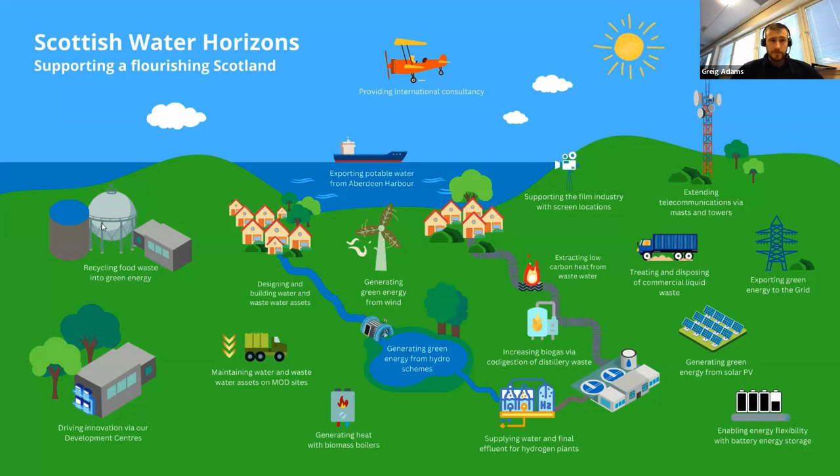Ourselves specifically, what I'm going to be talking to you a bit more about today, is our development centres. So our development centres harness the Scottish Water assets there to drive innovation in the water and wastewater sector.

We have two live water and wastewater assets which are on a live treatment works, where you can tap in to test your products on a real life situation rather than using lab based testing.

This contributes to the Scottish Government Hydro Nation ambitions. We aim to foster cross-sector collaboration and knowledge exchange. This is a key partnership with the Industrial Biotechnology Innovation Centre, having Bioeconomy Cluster sessions like today. As I said, it's managed through Scottish Water Horizons on Scottish Water-owned assets.

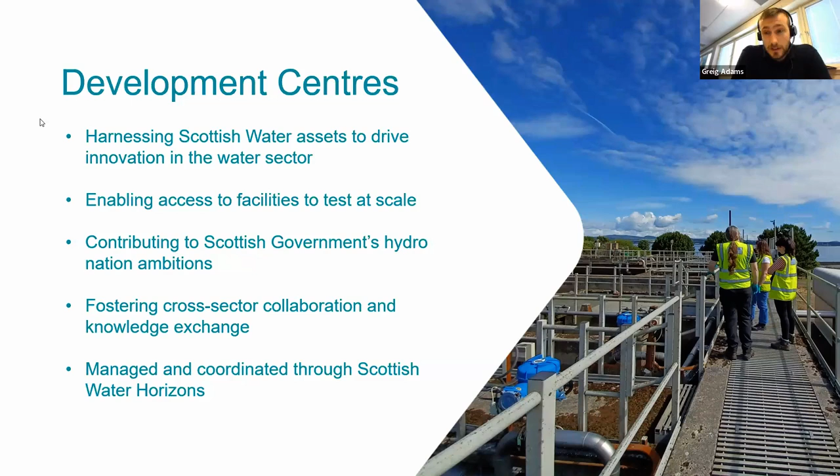Our key sectors, obviously, are the water industry and the wastewater industry - that's our focus, it's what we specialize in. However, we can also cater to biotechnology, pharmaceutical, construction, food industry, and the drink industry.

So Jonathan, who you'll hear from a little bit later on, he came to our site at Bo'ness and brought his own feedstocks from the fishing industry - he built an IBC load of fish waste in our car park to be used as the feedstock for his trial. We've had other food and drink products too.

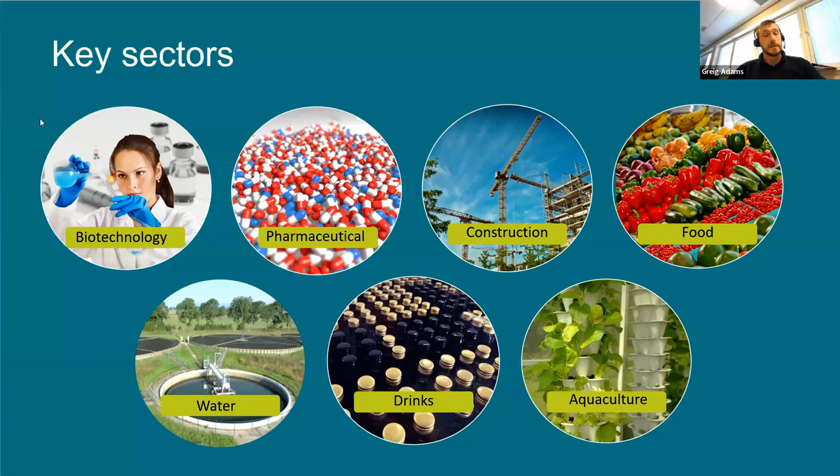We've had pot ale trials from the whisky industry. So we can cater to a wide array of testing parameters if we've got the space for it, and we've got the operators who are always keen to have a new toy.

So our vision is really innovation in the industry. We're looking, with our development centres, to become a gateway and a vessel for new technologies, businesses, academia, and collaborations like the Hydro Nation Chair and Biotechnology Innovation Centre, really to address current problems. There's always problems, and future problems such as climate change, water scarcity, resource limitations, and problems we've not even thought of yet. We want to be at the forefront of tackling these issues and providing a solution.

So at both our centres, the real gain for what we offer is that they're on a live treatment work, so it's 100% real day-to-day effluent and raw water coming in to be tested on. We've got technical expertise, really great relationships within Scottish Water, process science teams, research and innovation teams, and access to UKAS accredited scientific services.

On our sites we have bench testing capabilities, but we also have the facility to send samples to the Scottish Water laboratories to get official sample results, which can be tested against, as I said, UKAS accredited standards.

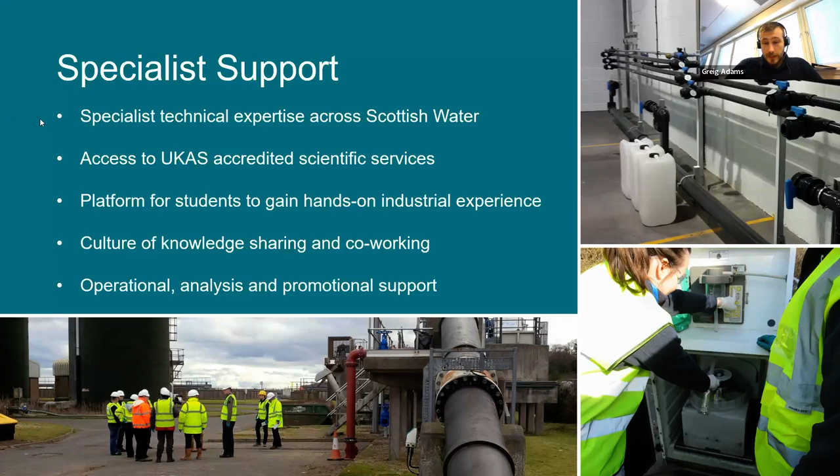We've got a culture of knowledge sharing and co-working, so again we regularly host sessions with industry partners, and we've got a wealth of experience - a number of operators, project coordinators, and a great marketing team at Scottish Water Horizons, so you won't be short of support if you come to our sites.

So we'll delve a bit more specifically into each site. As I say, we've got two. We've got a wastewater development centre located at Bo'ness, about 25 minutes outside of Edinburgh. It's got a live effluent stream, so you can test right from the raw sewage coming in, post screening, post settlement, and then right through to the final effluent.

We've also got a number of redundant assets on site that are available if you require to use them. We can set up a new project specifically tailored to the needs of the trial.

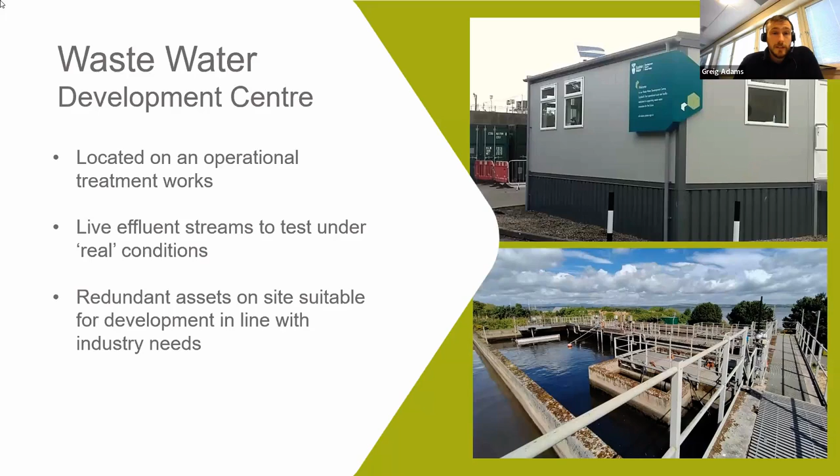So I'm going to go into, see if this works, a 360 view of the testing hall. Hopefully, yeah. So this is our testing hall at Bo'ness. So we've got three bays internally, and as you can see at the back, you've got the live effluent streams which you can tap into. It's really just a plug and play valve system, and we've got 2-pin and 3-pin sockets.

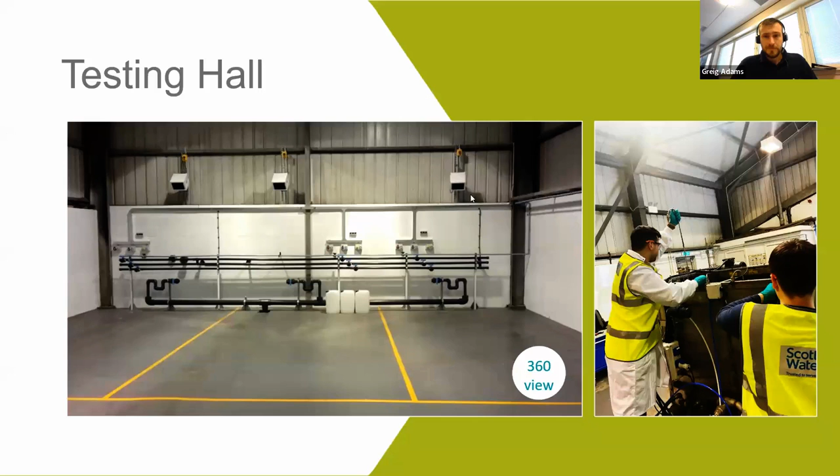We've also got external space for if you've got a bigger bit of equipment, it can fit outside in the car park, and we've got the feeds come right to the outside. We've also got around the other side a dedicated inlet testing area. So this is the inlet flow, and we've got a pipe that tees off that you can again just plug and play into a flange there for screenings and fine screening technologies, grit separation technology, and also if you're looking to test a pump on some of the chunkier sewage that comes in at the front end.

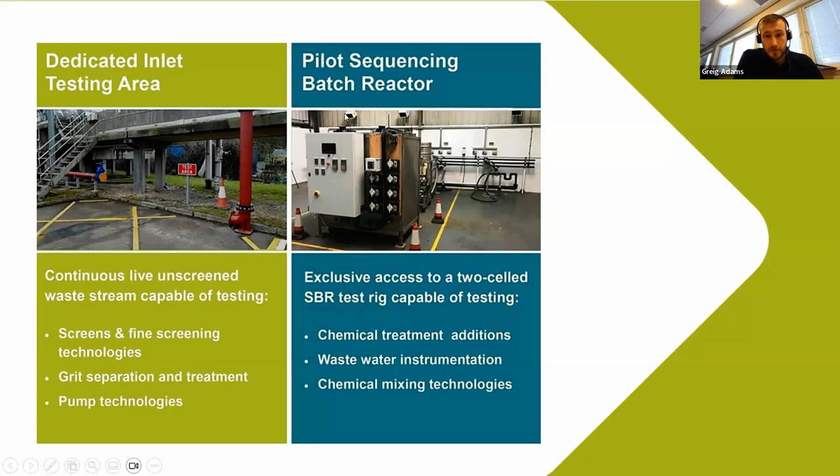We also have access to a pilot sequencing batch reactor. So it can be used as a single consecutive cell, or it can be used as a double cell for whatever treatment you're looking to try. We've had people use it for chemical treatment additions, so likes of poly addition to the floc, wastewater instrumentation. It can be rigged up to sit on top of the reactor, and other sorts of chemical mixing technologies.

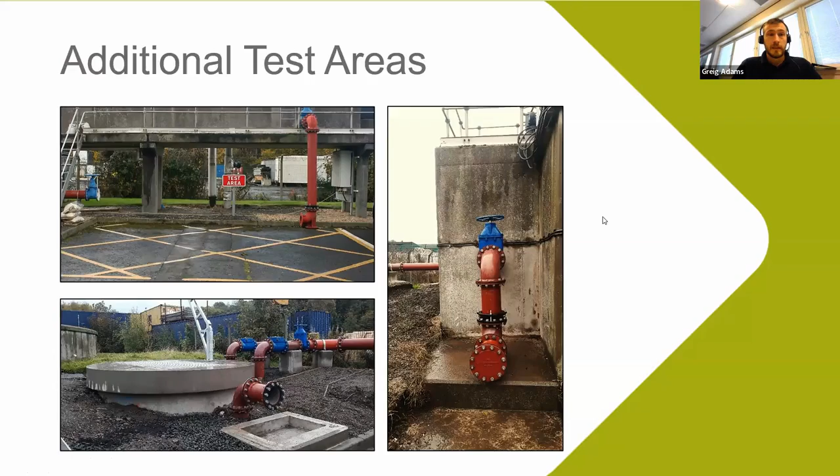So this is just a quick couple of examples. We've got some great speakers to talk about their time here, but there's just a couple of examples of people we've had. So Microvi, they used biocatalysts to treat the wastewater. So you can see it's quite a simplistic rig setup. They've just got buckets of containers with piping in between. So it can be a very low tech, low sort of budget trial. It doesn't have to be a huge rig.

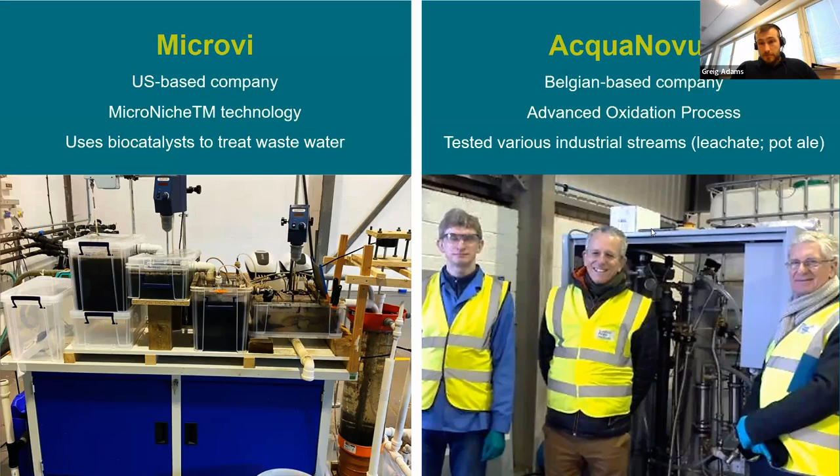As you can see at AcquaNovus on the right hand side, they were using pot ale from the whiskey industry, and you can see they've brought their own rig from laboratory testing to plug in and use the space available. And then, as I mentioned, we've got a couple of bigger pieces of equipment. So Jacopa, a sludge machine. It's quite a big unit. It was sat outside. And then we've got Power and Water, who are also going to be speaking a little bit later on. You can see their equipment there. It was sat outside, and plugged into the wastewater stream.

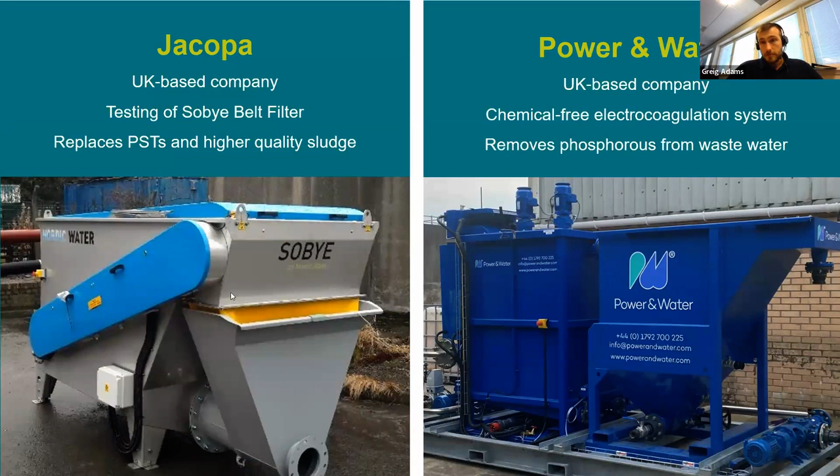So moving on to our water development centre, it's based up in Gorthleck, which is sort of on the banks of Loch Ness, about half an hour drive from Inverness. So it was a disused membrane treatment works. The area has since been mained out to a larger treatment works. So we've made use of this brilliant asset. It's disconnected from the public water supply. So whatever treatment you're working on, it's not going to be going into people's drinking tap. So it's a low risk environment. You can really play about with it.

There's no concerns. And it's a highland resource, so it's got a very varied raw water quality, and depending on the weather, it can vary over time. It can be quite dark as well. So you get some of the best water treatment conditions to really test out your trials.

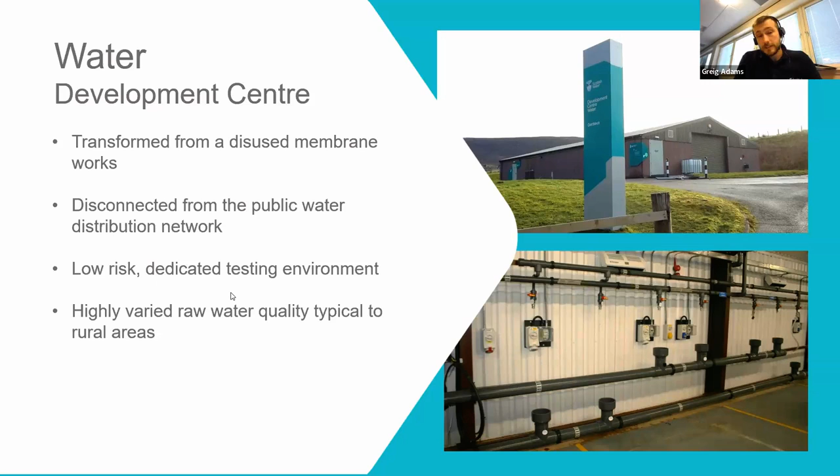So again, I'll try into the 360 just to show the testing hall. So you can see there we've got 3 bays, very similar setup with the inlet feed. So that goes from the raw water into the membranes, and so you've got untreated and treated water that you can test on. We've got quite a big hall, and then you can see these rigs. We've got spiral membranes, tubular membranes. So it's again a very robust treatment works.

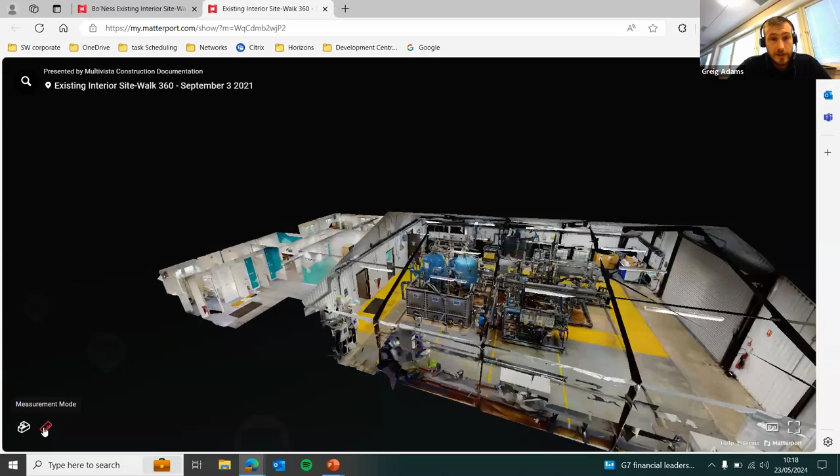Just to give you an idea of the rest of the facilities, we've also got a meeting room, which can be used if you're taking a trial. You can take meetings there. You can have your lunch there. We've also got, if I go through into the hallway, hopefully, we've got a canteen in there.

Not working, but so it's a really brand new asset. It's got great conditions. So you're up in the Highlands, but it's a very comfortable stay while you're there.

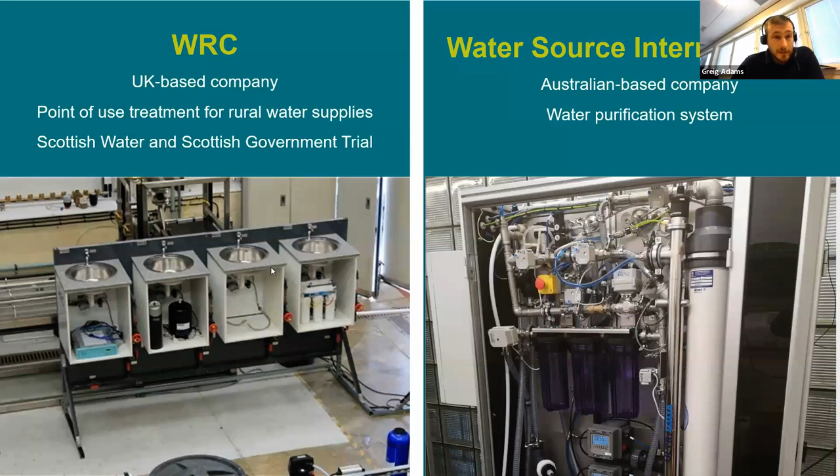So again, a couple of trials we've had in the past: the Scottish Water and Scottish Government combined trial to look at point of use treatment for rural water supplies. So that's essentially treating the water at the tap when you turn it on, rather than treating it externally and then having it travel long distances to rural people's houses.

And then we've also had Water Source International come across from Australia to trial out their water purification system. So you can see that there, it's got quite an intense piece of equipment. So that was trialing against the raw water quality, which as I say is very temperamental, which is really the best you can hope for in a trial situation, to get the biggest variation to prove your kit.

Also rolling out at Gorthleck is the Membrane Training Academy. So our Scottish Water Process Science Membrane Excellence team, they're premier experts in membrane treatment. We've got a lot of membranes in the rural community in the north of Scotland. So these guys are experts. They're going to be training. They started training internally, so all of our Scottish Water treatment operators will be trained up in how to use the membranes. So as I say, we've got spiral membranes and tubular membranes.

So it's a very interactive training course. They go in and essentially break the system and show you every way that it can be fixed, so that you're equipped to deal with any emergency. It also teaches you about the membrane maintenance requirements, so foam ball changes, the instrumentation, and the disinfection stage post treatment. So this is going to be launched externally for other water treatment companies and anybody else that is looking to get trained up on membrane technology.

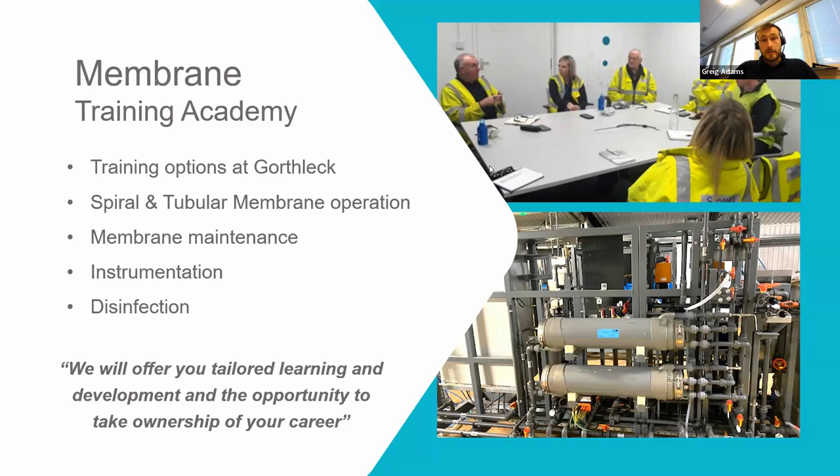So just some of the key benefits I'll highlight, which I've sort of touched on at our sites. As I say, it's very low risk. At Gorthleck, it's completely disconnected from the treatment supply, and at Bo'ness, it goes back to the head of the works. So anything that is treated is going to get retreated before it goes into the river. So it's very low risk. You're not going to cause any problems if something goes wrong or your technology doesn't work the way you expected. As I say, it's live, 100% live conditions, comes straight off the works, and it's at a large scale.

We've got insurance against any problems on site. We're also engaged with SEPA, so we've got licenses there for making sure that nothing goes wrong and is getting put out into the river. We've also got, as I say, UKAS accreditation. We've got abstraction licenses at Gorthleck.

Support-wise, we've got project managers in our team who can organize and manage and scope a trial, so we can really take it from an idea, or you've got a bit of equipment, straight through to a plan, testing conditions, your lab samples. Everything can be organized from our end. We've got the expertise in that. We've got operator support, so you can either choose to run it yourself. You're more than welcome to attend site and run your equipment yourself, or you've got the option to train our operators up on your equipment and let us run it for weeks, months, however long you require it.

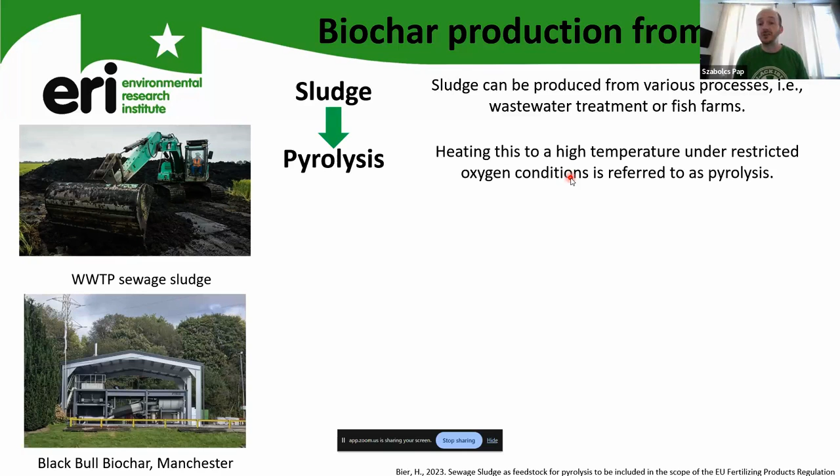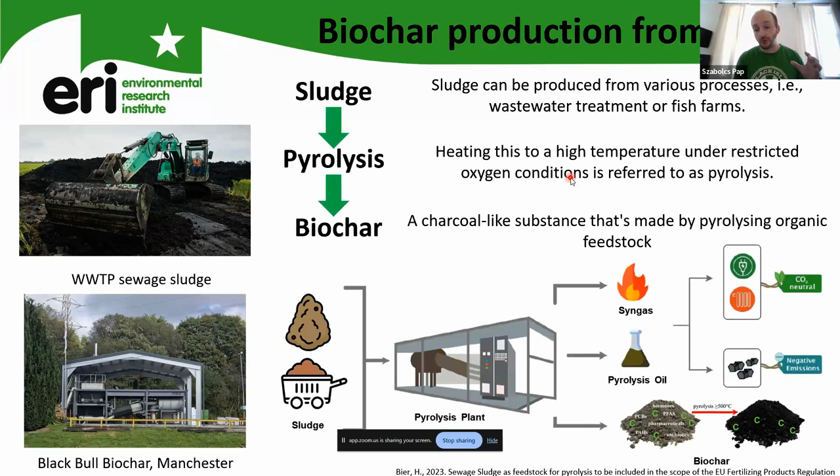So just really quickly, what is biochar? Biochar can be produced from different feedstock. In this case, it was from sewage sludge, which is a byproduct, a bioresource from wastewater treatment plants, or it could be from fish farms. The process by which we produce biochar is pyrolysis, which is high temperature combustion under oxygen limited conditions. Biochar is one of the final products, but we have two other phases: the syngas and the pyrolysis or bio oil. Those are the solid, gas and liquid phases from the pyrolysis. And in this project we are interested solely in the solid phase, or biochar.

So a little bit about the regulation and the market perspective for biochar. Everything started a little bit more than 10 years ago in Europe, when the European Commission funded the STRUBIAS group.

At the time this group was founded, the UK was still a member of the European Union, but in the meantime the UK left. This group helped to develop the new European Union Fertilising Products Regulation, and because of this, from 2022 we have biochar as a marketable fertilizer in the European market.

Sewage sludge is not really included, because sewage sludge is excluded from this regulation, but they left the back door open: if some country in the European Union wants to allow sewage sludge biochar to be used as a fertilizer, then they can do that. That's the reason, for example, in the Czech Republic, Estonia or Sweden, they are already using sewage sludge biochar as a fertilizer.

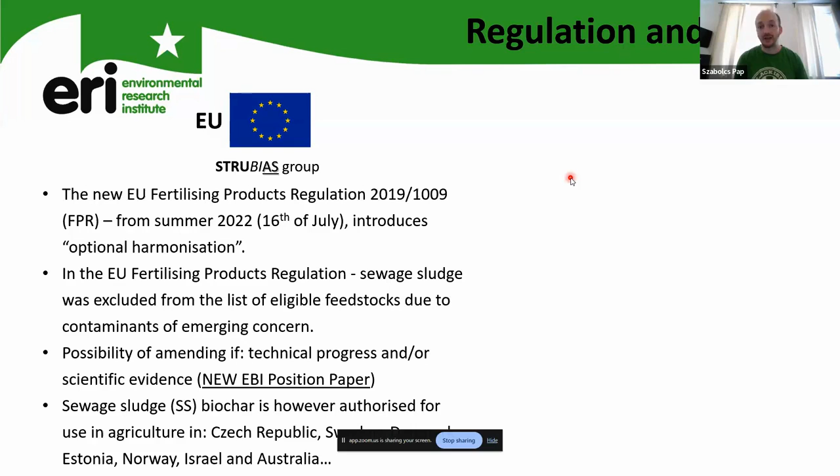Also, the European Biochar Initiative just submitted to the European Commission, about a month ago, a new position paper, which we think is going to really help to finally sort out this problem about sewage sludge biochar in Europe. So we think that in the next 1 to 2 years, it will be included in this regulation, and it will be a marketable product everywhere.

In the UK, we don't have any regulation for biochar, not even from cleaner feedstock. When I say cleaner feedstock, I mean, let's say, wood chip. So we don't have regulation for those biochars, and of course not for sewage sludge. There are a couple of attempts, and for example, this project came to life because we want to push forward with SEPA and the Scottish government to allow biochar and sewage sludge biochar to be a marketable product in different

industrial sectors. For example, we had this biochar quality mandate, which was published around 10 years ago, and we updated it last year. We included sewage sludge biochars in the biochar quality mandate document, and hopefully this will help the decision makers move forward the whole biochar story in the UK.

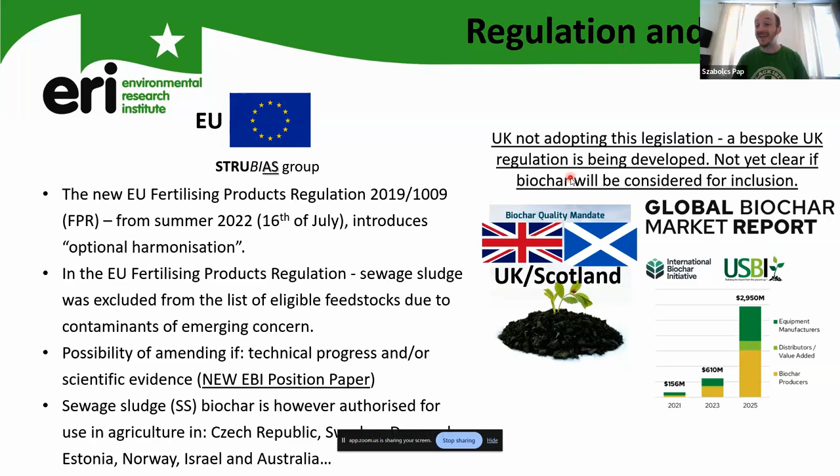The global biochar market is really an expanding market, and it looks like a really rich market, for many different reasons which I don't have time to explain right now. For example, the prediction for 2025 is that the biochar market value will be around $3 billion US. Just 2 years ago the prediction was 10 times lower, around $300 million, and now it's already 10 times higher. So it's a really growing, expanding market.

Why pyrolysis, and why pyrolyze bioresources or sewage sludge? Because it solves loads of different problems. For example, destroying all the pathogens in the sewage sludge, eliminating almost 100% of the organic contaminants, immobilizing heavy metals, reducing their bioavailability and toxicity, and eliminating micro- and nanoplastics. It's a carbon sink and greenhouse gas emission reduction technology.

Also, because sewage sludge in its native form is really rich in nutrients, there's a potential carbon-negative phosphorus fertilizer, and pyrolysis is already today a deployable and scalable technology. There are loads of companies in Europe and worldwide producing large-scale pyrolysis units which can be deployed on a wastewater treatment plant and pyrolyze the produced sludge.

And there are always these exotic chemicals like PFAS, which are also called forever chemicals. For example, one of SEPA's major concerns about sewage sludge biochar is what we are going to do with these forever chemicals, because they are designed to be stable at higher temperatures. But there is a way to get rid of these, and we will come back to this a little later when I present some results from the project.

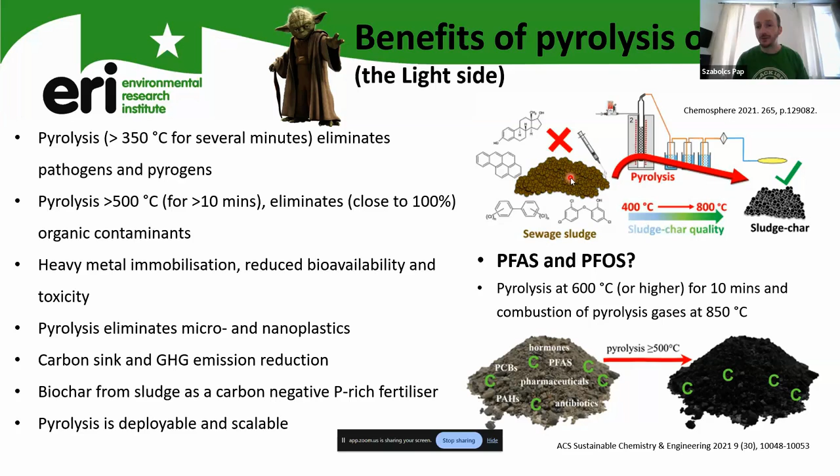There's always a dark side, and we need to be careful how we produce the biochar and under which conditions, because we can end up with a product with a high concentration of PAHs or volatile organic compounds, or concentrate all the heavy metals and flame retardants, and then it's not going to do any good for the soil or in the water if you're using it for water treatment. That's the reason why we need regulation.

In recent years, when I spoke with different biochar producers, smaller and bigger companies, we all agreed that it's kind of annoying dealing with the regulators and decision makers about this, because they always have one or two more questions when we think we've addressed all the existing ones.

But again, it's a really important thing to have a regulation, because we can end up where everybody will start to burn their waste and then sell it as biochar. So we really need to clearly define what biochar is and how it should be produced, and then what values and quality we should achieve before going into the market.

So about the project, we started this project in mid last year, in 2023. Because this is a feasibility study, we needed to limit our objectives and try during that half year to tick as many boxes as we can. So we defined four objectives.

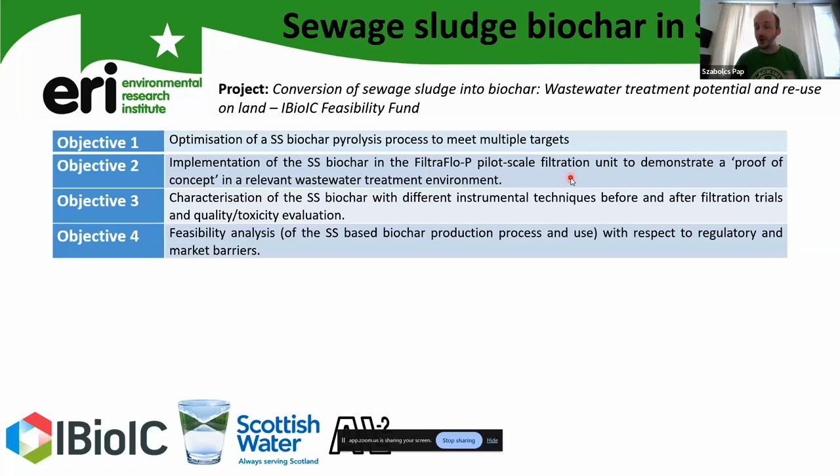And so we are now somewhere here in objective 4, where we're trying to sort out with Scottish Water when we can potentially launch this sewage sludge biochar, and it's not only as a soil and fertilizer product, but we're exploring different other options as well.

And of course Scottish Water is really interested in this biochar material to solve different pollutant issues in the water. So we also use this biochar in the meantime to remove flame retardants and different pharmaceuticals from wastewater, which is a really big topic right now in Scotland, and also heavy metals as well.

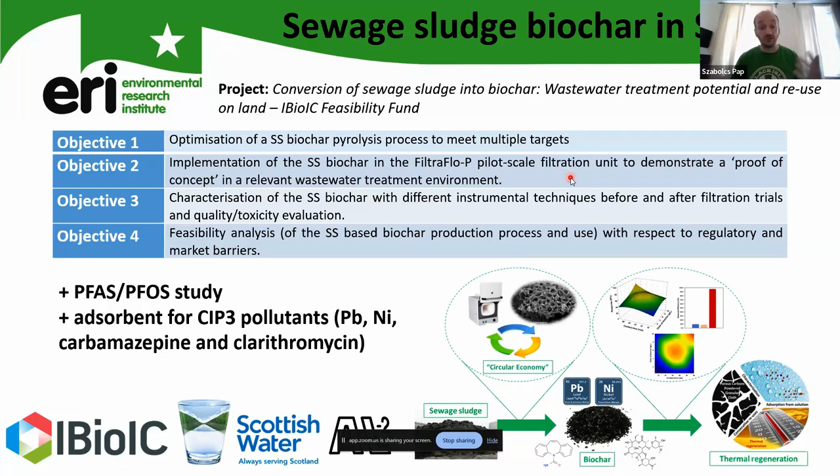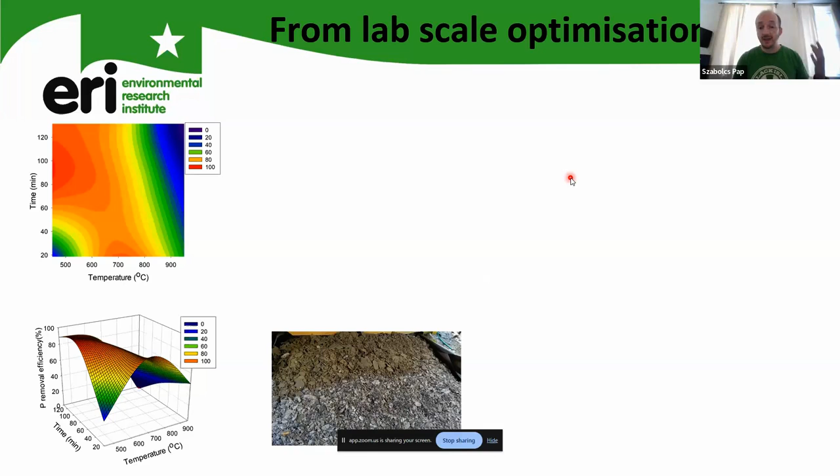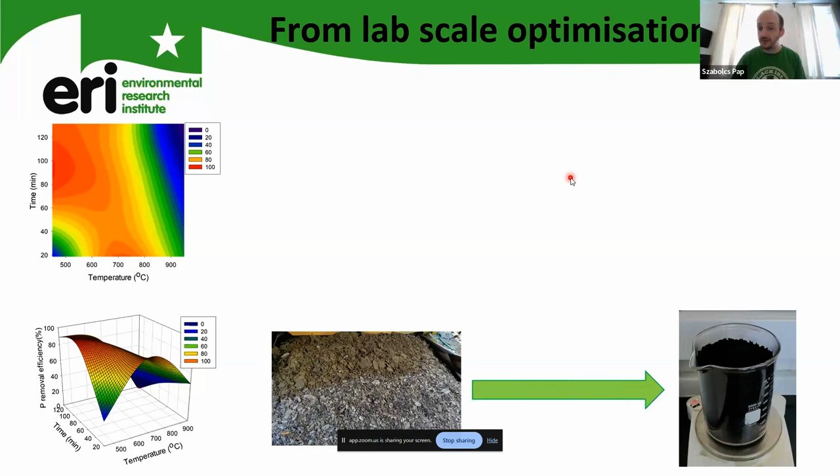So how we started: as the objective was, we optimized the whole process at laboratory scale. When we had the optimized biochar under certain conditions, we collected 100 kilograms of sludge and pyrolyzed it in a pilot-scale pyrolysis unit at the Environmental Research Institute. This produced, I think, between 30 and 40 kilograms of biochar.

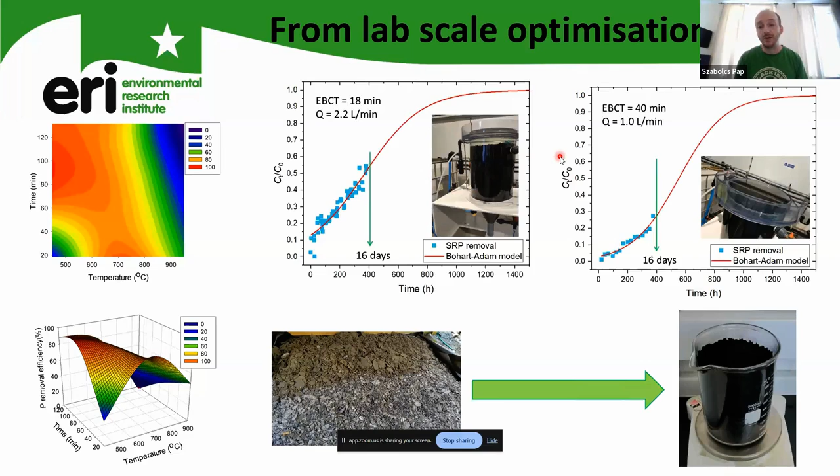And also why we used final effluent, just to explain briefly. With climate change and rising temperatures globally, we have more and more problems with algal blooms, and right now the regulation says the final effluent phosphorus content must be 1 ppm, 1 milligram per liter. But because of these warming conditions, it's starting to become a burden for the water bodies, because even in these conditions we can consider this a high concentration.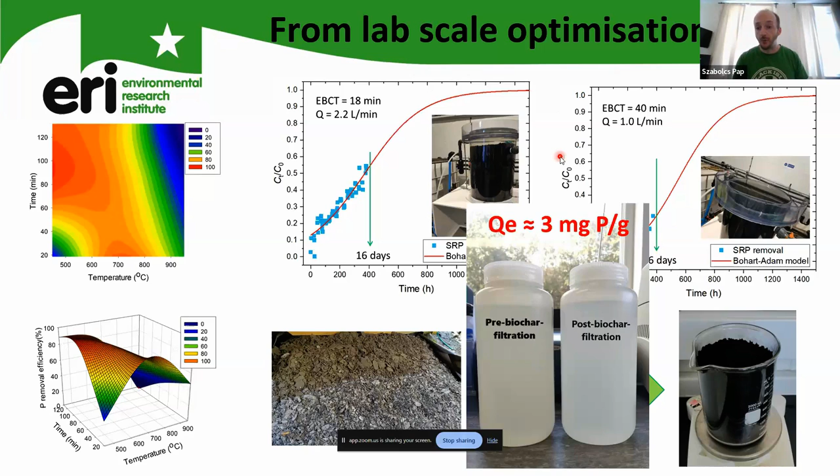So we need some additional technologies to reduce that phosphorus level further, let's say at least below 0.1, so at least 10 times. But those dealing with wastewater treatment know that it's not really easy or cheap to remove phosphorus from water.

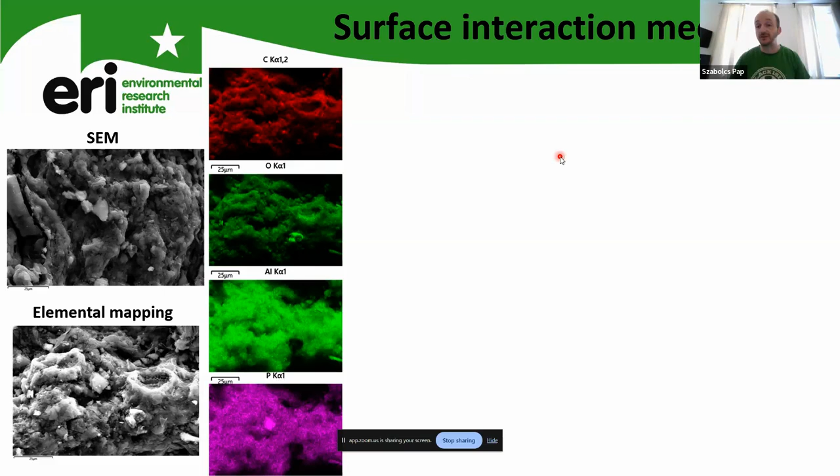Scottish Water uses loads of different coagulants, flocculants, aluminium- and iron-based chemicals to reduce the phosphorus level in the wastewater. So the sludge natively contains loads of these metal elements, and we are utilizing this property of the sewage sludge to produce a material which can actually be used as a filtration material for phosphorus.

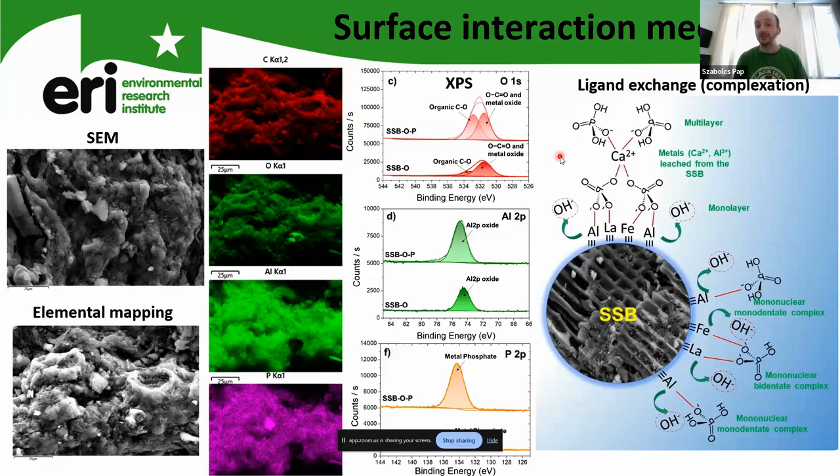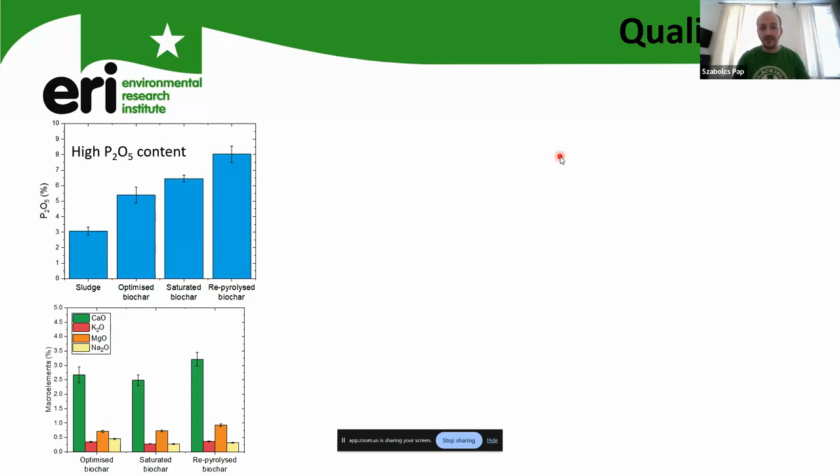So then we did the repyrolysis. It's a really quick flash process just to clean out the material, and that process even further increases the phosphorus level. We have a healthy ratio of different macro elements like potassium, sodium, calcium, magnesium. The quality we showed them in this optimization process is producing quite high quality biochar, because when we take into consideration the regulation limits for biochar, classified as premium or agro grade, with heavy metals like lead, cadmium, nickel, zinc, chromium, arsenic, we are all below these premium biochar regulation limits.

The only metal which is sticking out is copper. But copper can sometimes be a really beneficial and essential element in some soil types. So we're not really worried about this copper level, because it's not seriously or enormously higher, and it's better to have a higher copper content than, for example, lead or cadmium.

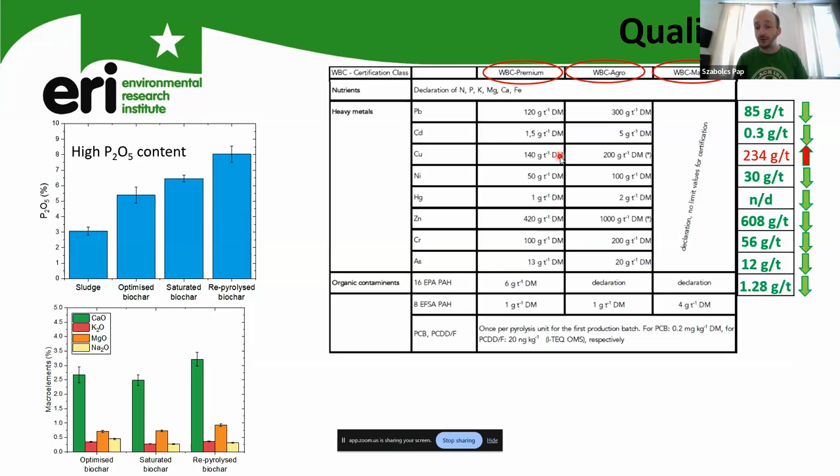Also the PAH content is lower than what's regulated by this standard, and we did not detect any PFAS or PFAS-like chemicals, flame retardants, in the biochars. This could be related to the optimized pyrolysis process, but also to the sludge being quite clean, because some of the sludge for this biochar was collected in a less industrial territory from Scotland, so it's not all come from, let's say, the central belt.

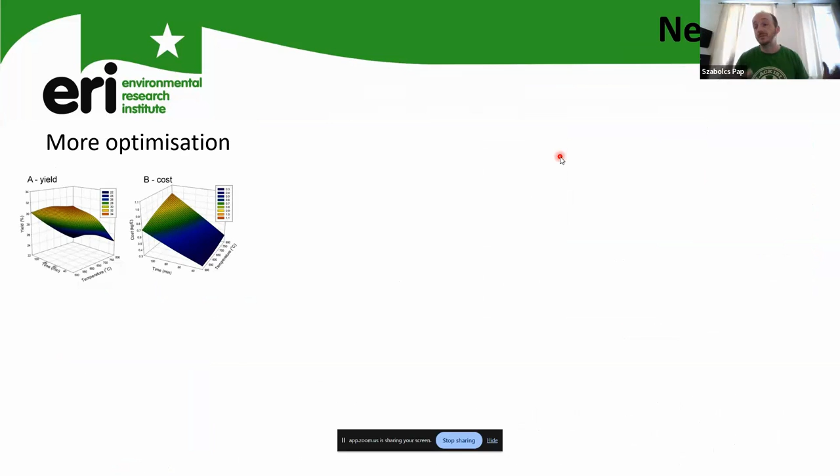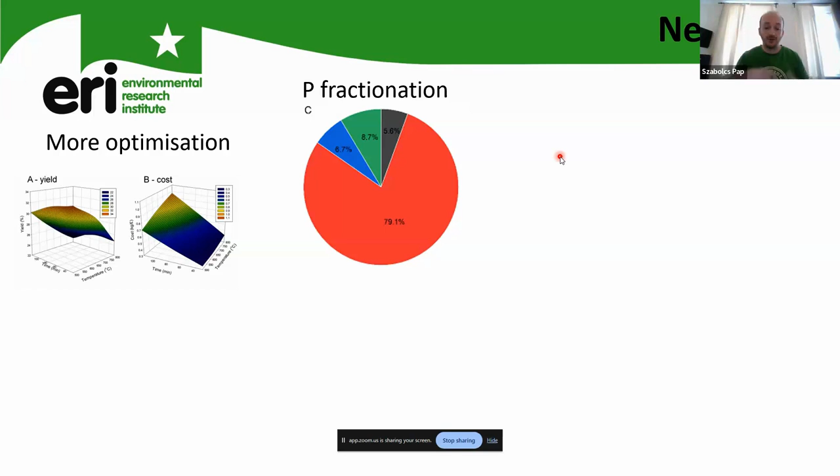The next steps for the project: we definitely need more optimization, at least to include a larger sample size of different sludge samples from different wastewater treatment plants across Scotland, because we need a unified model. We're already doing this P-fractionation to see how much water soluble phosphorus is in the biochar, how much will be released in the soil, so how much is available for plants. We're designing now, for this summer season, some soil pot trials.

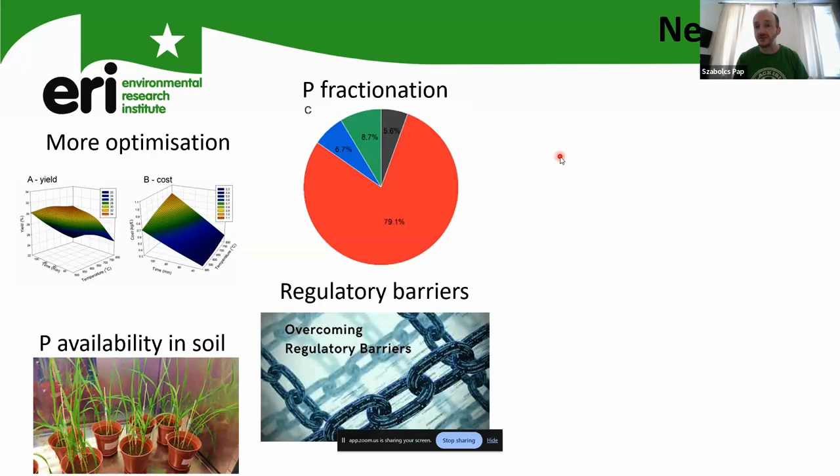We're really pushing these regulatory barriers with different stakeholders, companies, and of course SEPA as the Scottish government, trying to address their concerns. One new perspective we're considering is to use this biochar to leach out phosphorus for different chemical industries, and then the material which is left can be used as a construction fill material, which also will have a similar effect to locking up carbon, as we are putting into the soil.

And then we have different international collaborations through this project helping address different quality testing into the whole project.

Biochar is becoming quite a big thing in Scotland. For example, our team won last year the Innovation of the Year award at the Scottish Knowledge Exchange Award ceremony, and this was also related to producing biochar. For this project we also used the Bo'ness facility, so Scottish Water Horizons played a crucial part to achieve these results.

The King is also quite interested about biochar, and he's using it in his gardens. When we met with him, he said he's going to pass the good word around when he can in the UK, to help us bring this whole technology closer to the market. So that's me, and that's us with the group at ERI. Thank you.

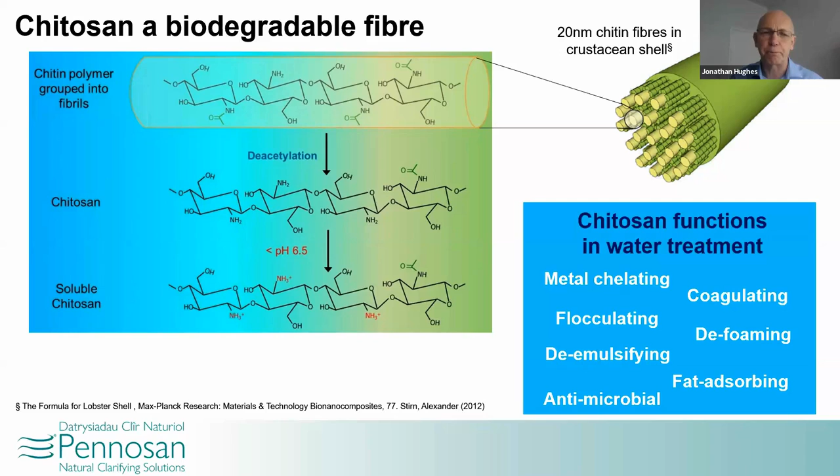Pennosan ourselves are the only manufacturer of chitosans and chitosan formulations for both home and leisure, and for environmental and industrial applications.

Our bulk of sales are predominantly in the home and leisure market, where people are looking to move away from chemical clarifying agents for swimming pools, swim spas, and hot tubs. They're seeing the benefits of using chitosan, particularly for reducing not only the dirt you can see, but actually some of the oils and sweat, etc., that you can't see in these situations.

These are the things that consume sanitizer and chlorine, and by removing them using chitosan, you can much reduce the amount of chlorine you're using in swimming pools, and you're not getting that irritating eyes or skin irritation effect. So it's a growing market for Pennosan.

In the environmental and industrial market, it's a growing market too, but we're still looking to grow that market. We've been in the area for quite a few years now, and there's more interest in looking at alternatives to chemical flocculants. Some of our competitor products: in swimming pools it's polyDADMACs, polyaluminium chlorides, polyacrylamides, and polyamines, and ferric in more industrial applications.

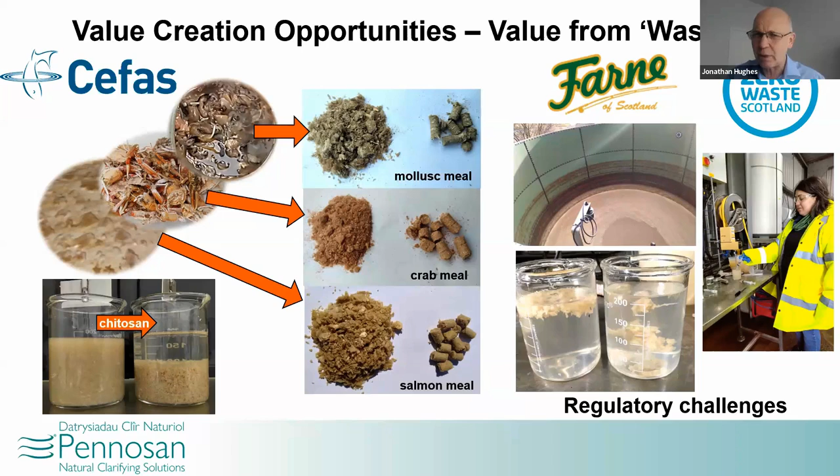So we were able to first look at that, and then some of the regulatory barriers to actually upcycling that. This fits very well with Farne's objectives - they sign up to the Courtauld Commitment to reduce their carbon footprint, and already the frames remaining from fish processing are sold on, so that's no longer a waste stream, and this is obviously the next target for them.

So with Farne's support and with Scottish Enterprise funding of a business support grant, we were able to access the Wastewater Development Centre at Bo'ness and essentially simulate some of the process that's currently operating at Farne. It was quite difficult to bring our process onto site with something that's operating at 13 meters cubed an hour.

But we were able, with Farne's support, to transfer some of their process water from the borders up to near Edinburgh to Bo'ness to actually simulate the process there. So essentially, it's very, very simple.

Where we have the process water, there's an adjustment of pH to bring it into range - the water as it's produced is up at pH 11, so we're able to bring it down to the suitable range for the chitosan dosing, and the product is Floxan grade product. So we're able to do a pipe flocculation and then a simulated dissolved air flotation unit to really separate off the protein and oil as a sludge.

Currently, that's where the process stops at present at Farne - they tanker off that sludge. They have investigated in the past the use of dewatering equipment to produce a drier sludge, but because that was contaminated with polyacrylamides and ferric, there really was no outlet for that.

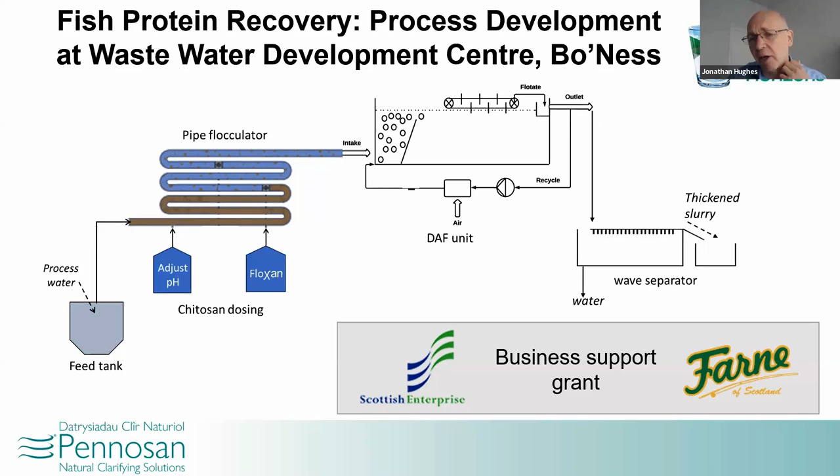So the inspiration of using chitosan is one where you've got something that's essentially shellfish-based and wholly natural, biodegradable, and food grade that can be incorporated within the sludge. So then we were able to investigate the use of a wave separator that gently dewaters and then presses the sludge to get a dry cake out of that process.

So Greg was mentioning earlier on, we were grateful to get some space outside, so we essentially tankered up something 20 or 30 IBCs of the wastewater at the beginning of this year to essentially run the process. We were looking to operate at about 150th of the scale of the process, so a relatively small scale pipe flocculator unit that we had on site there, and a rather simple setup for a DAF unit.

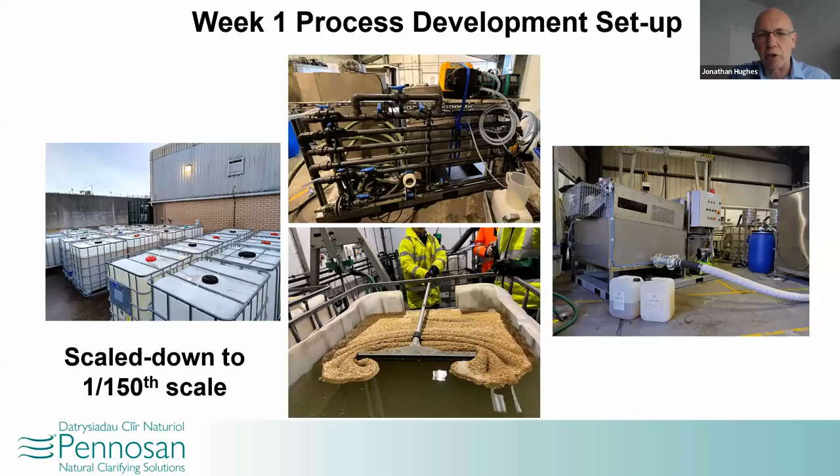But we were able to demonstrate relatively in this first week the essential of bringing the various component parts: the pH adjustment, the pipe flocculation, the DAF, and then the wave dewatering unit all together, and get the various parts operating. And really in the second week of the trials, we were able to really put the whole thing together and start doing some dosing trials, and it worked beautifully.

We were able to generate a really nice thickened sludge, over 95% solids recovery. COD was down around 1,000, which was equivalent to what they were achieving with the chemical flocculants on the site at Bowness. So yeah, at Farne Salmon in Duns. And what was really encouraging was that the wave dewatering unit was very effective at dewatering the sludges. We're getting sludges up to 33% dry solids coming off, and it was coming off a bit like biscuit material off the end of the system.

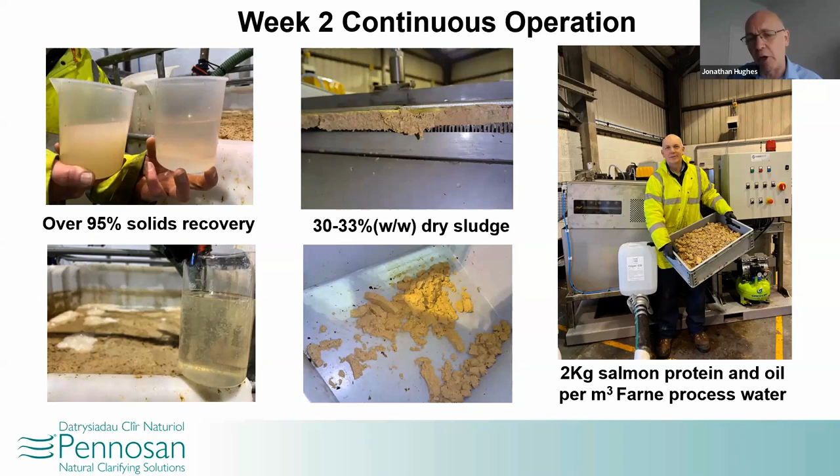So essentially the protein and oil levels that we were getting were about 2 kilos per meter cubed. So that would essentially translate to about 200 tons of salmon protein and oil that one site could produce of that quality, that could then potentially be upcycled into animal feed.

So yeah, hopefully that's given you a taster of what we were doing, and just say how grateful we are to the guys up at Bo'ness for accommodating us and supporting the trials, and a particular acknowledgement to Angus Forbes, the environmental project manager at Farne Salmon, who's really been championing the use of chitosan in their processes. So I'd like to stop there if that's okay.

Brilliant. Thanks, Jonathan. It's such an interesting collaboration, and great to hear about a technology that really looks like it has so many applications. So thanks. I'll hand over now to Mike Rattenbury, who is the Chief Operational Officer at Power and Water, and can speak a bit about their work.

Yeah, thanks, Kim. Just briefly, while I'm pulling up the presentation, as Kim says, I'm Mike Rattenbury, the Chief Operating Officer of Power and Water. My colleague Sharon's here with me. Hopefully that's come through now.

Yeah, so our product is called Seneco, and we combine electrolysis and ultrasound for electrocoagulation. So we essentially generate the metal coagulant directly from a sacrificial anode, which then precipitates the contaminants for solid separation downstream. So we dose the metal into the wastewater stream, bring the metal contaminants together, and then it settles out the metal contamination complex, which then obviously reduces contaminant levels.

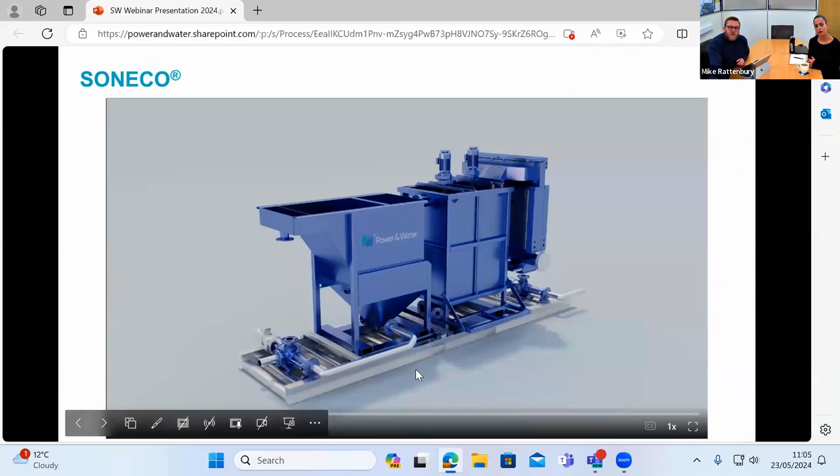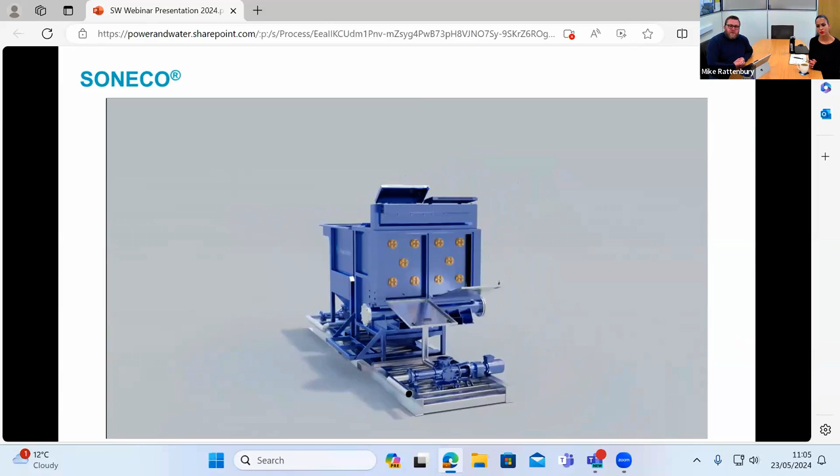So I've got a brief video just to show you what our equipment looks like, although we hopefully saw a picture earlier with it on site in Scotland. So this is essentially our process. Our process is skid mounted, and it comes as a package plant effectively. So the 2-chamber reactor at the front, which we're seeing the cutout of now, is the electrocoagulation unit. You'll see that we had ultrasonic discs there mounted on the outside. I'll come to the reason for them shortly.

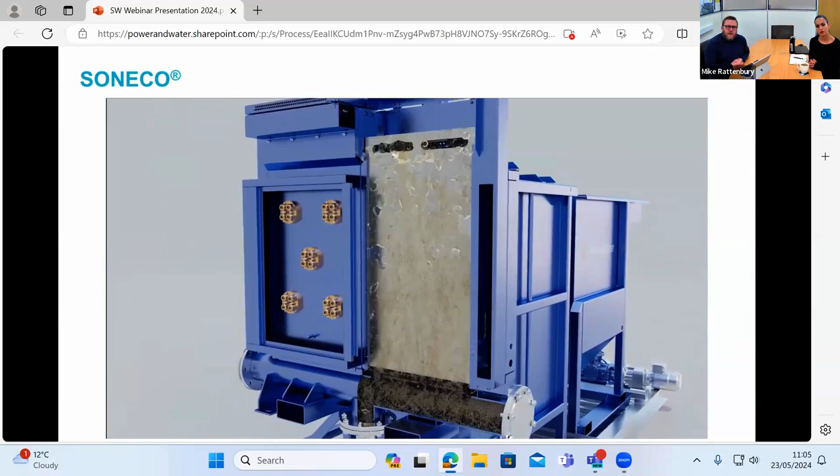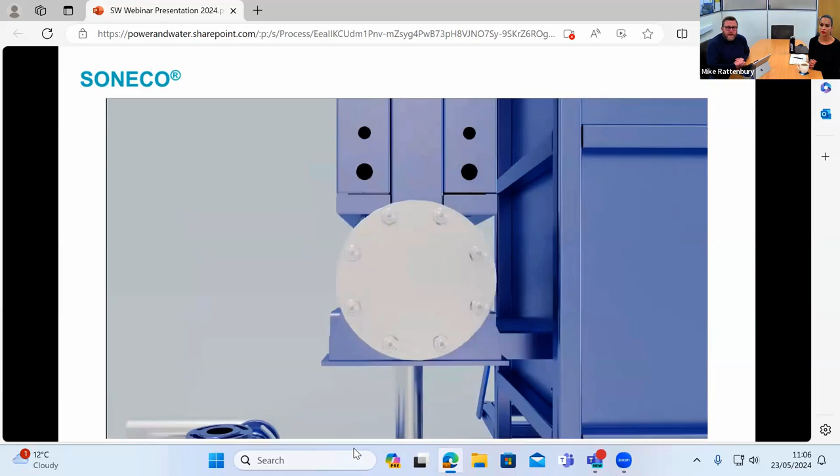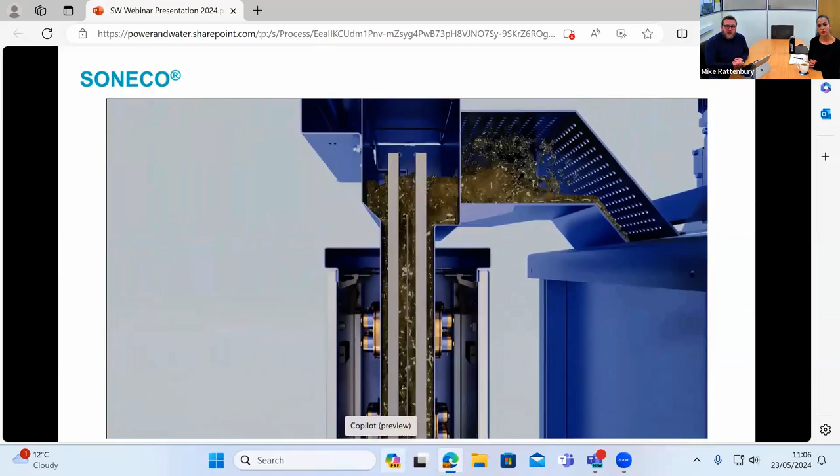So the wastewater stream will flow up through the electrocoagulation chamber, and a metal anode will be releasing the coagulant, which typically in a wastewater setting would be iron. So there's a cutaway there to show you how the wastewater moves up over the anodes themselves. So once it's been through that chamber, it'll flow out into the mix tank. So it'll weir over there. The first chamber of the mix tank is a flash mix for degassing.

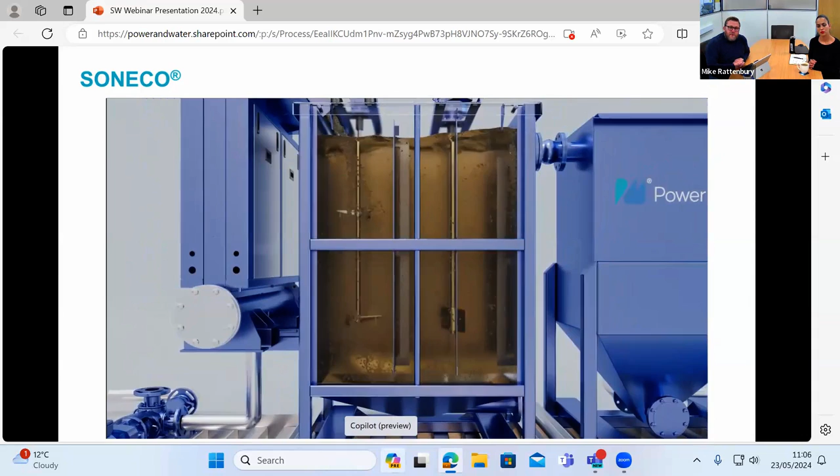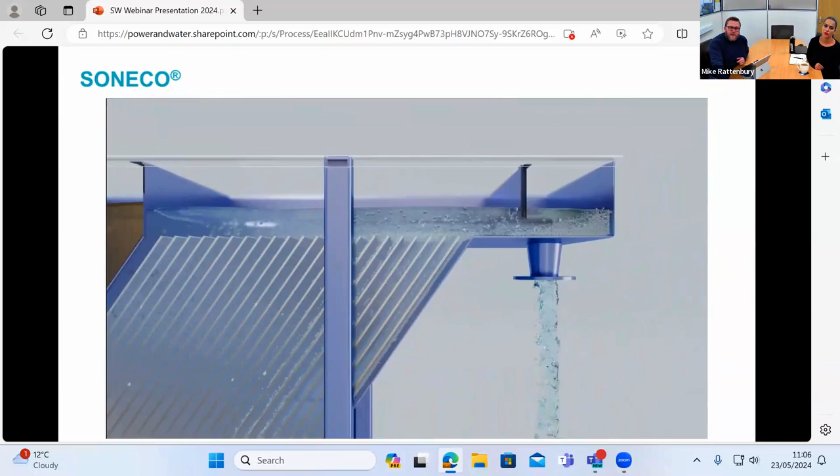And then the effluent will move through into the flocculation chamber with a slow mixer, and then typically it'll come through into a lamella. So you can see there the sludge would be taken from the bottom, and the clean water then would exit on the top. So yeah, that's the typical layout of our SONECO skid.

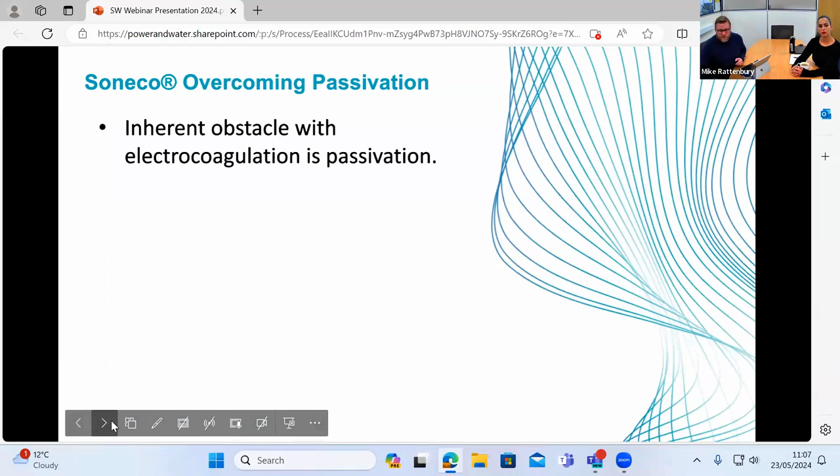So I mentioned the ultrasonics there earlier. The ultrasonic crystals is what we use to overcome passivation, which was an inherent obstacle with electrocoagulation in the past. We are the only company that has the externally mounted ultrasonics for passivation control. And passivation, as you know, is the corrosion layer that will coat the anode surface.

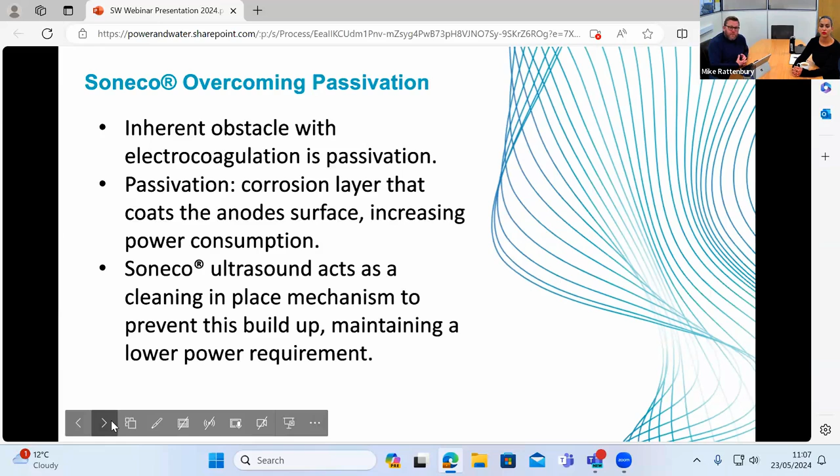And what that does is it basically creates a resistance layer, which increases the power consumption. So by acting as a cleaning in place mechanism, the ultrasound that we have as part of our system prevents the buildup, and that then in turn maintains a lower power requirement.

So what can Soneco do? It has multiple heads. So it's particularly suited for phosphorus, solids, and COD removal in a municipal setting. We also have units in the field in the industrial arena, most notably with Hanson, where we've allowed them in the creation of the cement products to basically close loop their water system so that they don't have to extract or indeed discharge into the local water courses.

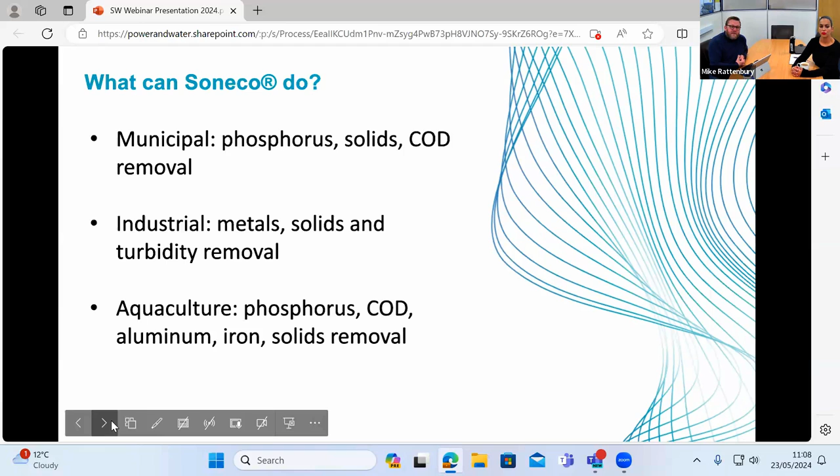And then in aquaculture, we have a number of units, again, phosphorus removal, COD removal, solids, using a variety of anodes from aluminium to iron.

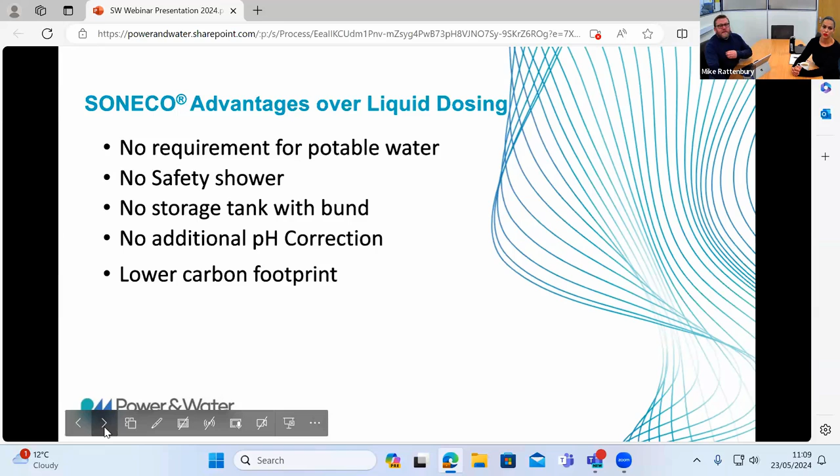So our advantages over liquid chemical dosing is there's no requirement for potable water, no safety showers needed because we generate the coagulant from a solid metal plate, which then means there's no need for a storage tank and associated bunding. Quite notably, no additional pH correction, which is certainly a big thing when it comes to liquid chemical dosing and indeed some other competing technologies. And it has a much lower carbon footprint.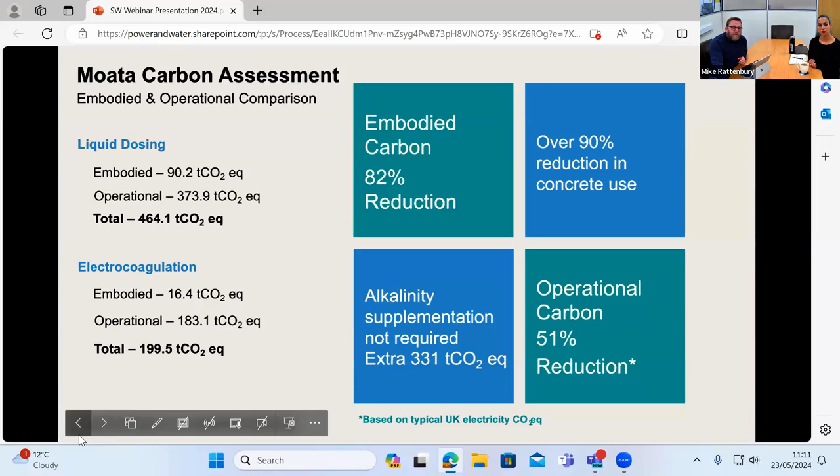So the last 12 to 24 months, we were part of the Scottish Water Horizons trial, which was fantastic for us. I'll touch on that in a second. Northumbrian Water have taken some systems which are going live on their site shortly. Wessex Water, again, they'll be live in the coming weeks. And Yorkshire Water have actually placed a significant number of orders, which will be rolled out over the coming months up to the end of this year so that they can meet their AMP7 requirements.

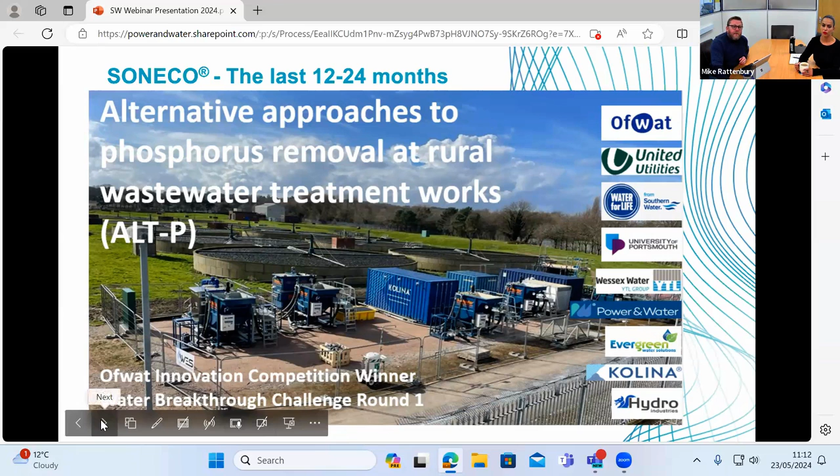It also gave us the opportunity to optimize dose settings for P removal, using iron plates in particular, considering different influents. So we set this at various points of the wastewater treatment cycle. And it was also an opportunity to extend our real world data and performance analysis for the Soneco equipment.

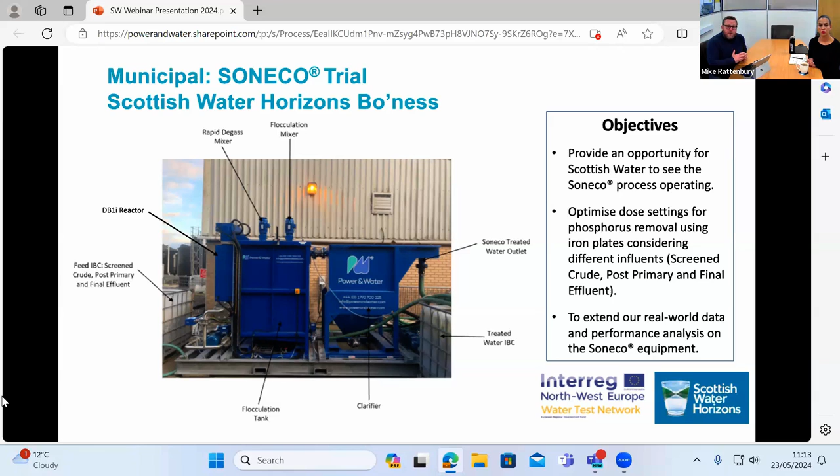So we were able, as I say, to show it on a range of influent. And in particular, while it wasn't the focus of this particular investigation, we did find that the doses applied to the screened crude and the post-primary wastewater for P removal also showed very good COD and TSS removal.

And quite strikingly for us, whilst we knew that we were certainly very competitive in terms of power and therefore power costs, a total cost of £65 was our running costs for the 12 weeks of operation, which were even more positive than what we had anticipated. So yeah, that was our experience at the Scottish Water site, and that's the end of the presentation.

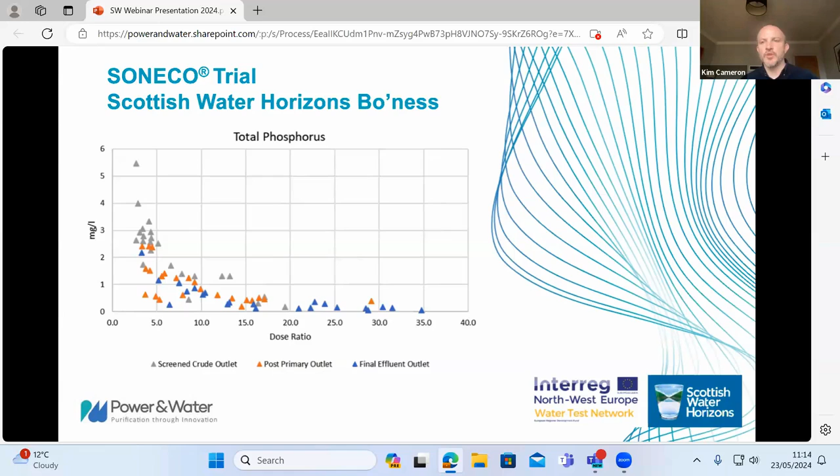So we're going to turn now to the Q&A. I've got a very generic question here, first of all, for Greg. What would you say would be the first step for someone thinking about accessing Scottish Water Horizons facilities and the voucher scheme?

Yeah, that's a good question. I suppose the key is if you've got the technology, if you've got a piece of equipment, the key question for a trial is what are you hoping to achieve, and that's something that we can assist in, a goal for what the output of your product would be. So if you're not at a stage that you're ready to trial, we're more than happy to have a discussion and point you in the right direction to get you into that state where you're ready to trial. So I would say there's nothing hard and fast if you've got something that you're looking to trial. We're open and ready for business to accept you at any stage, really.